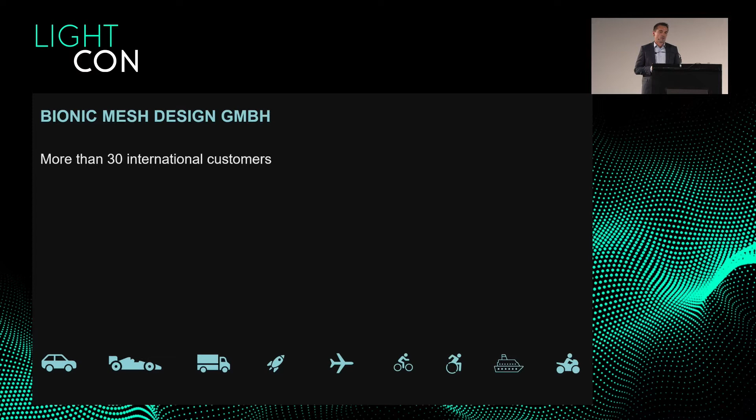I founded Bionic Mesh Design. I have 2 employees till today. We have about 30 international customers, mainly automotive OEMs, where we are already integrated in their series development processes.

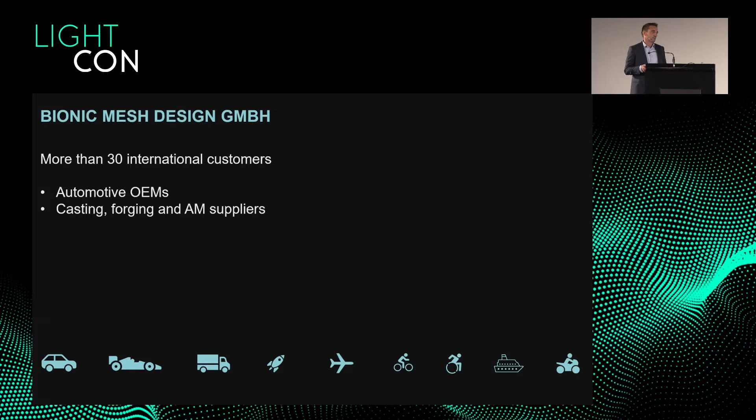We are also working together with casting, forging, and AM suppliers, especially with their research and development departments. Lightweight design also plays a small role in suppliers for manufacturing systems, to reduce mass and make their machines running faster, and there additive manufacturing has an increasing role now.

Wind power is also something related to additive manufacturing in our case, and for sure also aerospace engineering. So what we provide to our customers is definitely a way to stay in their desired manufacturing method and just take as much mass out as possible. It means in the end they automatically save mass and by that also cost.

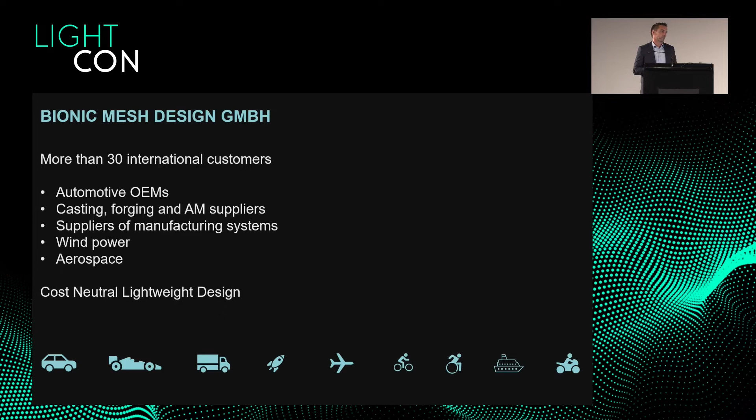I think what is distinguishing us is that we can deliver extremely light components in an extremely short time. How this is working, I will show you in the next minutes.

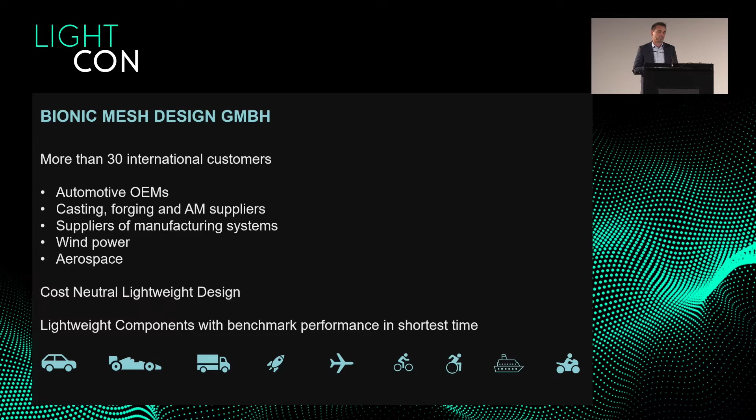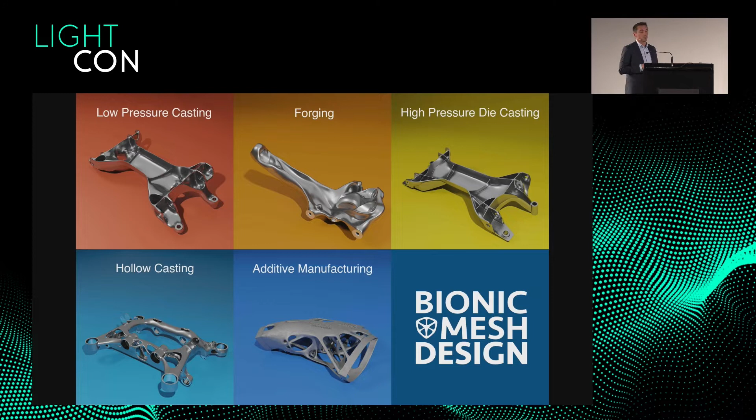We have a wide portfolio in developing lightweight components. Mainly we are focusing on, as the title of my presentation says, mass production methods like casting and forging. And for sure we are also developing components for additive manufacturing.

But first to my own motivation to pursue lightweighting. Since my studies, I am infected with lightweight engineering or lightweight designs and learned that lightweighting is directly related to payload, especially in aerospace, but also in heavy cargo industries, where till today lightweighting has not played a major role yet.

Because the only trucks which are running on full load are tanker trucks. But electrification leads to a rethink now also in this area, what we directly see in an increasing demand of our services in this field.

On my next career stop in motorsports, I learned that lightweighting is associated with driving dynamics. A lighter car accelerates faster, you have higher cornering speeds, you can brake better, you have less tire wear and also less fuel consumption.

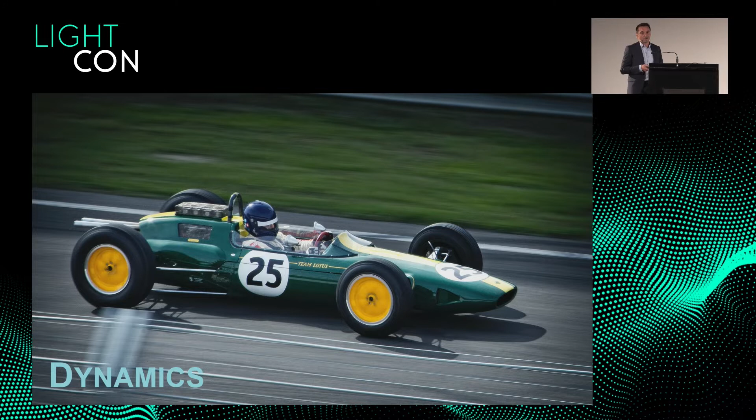I think an extremely big topic now is range, especially for electric cars, but unfortunately I have no numbers related to that. For combustion cars, 100 kilograms less in the final mass of the car leads to a reduced fuel consumption of about 0.5 liters per 100 kilometers.

What is this similar thing in EVs? I haven't found yet. So especially electrification leads to a higher demand in using aluminium. There is no way around using aluminium, and lightweighting will play a decisive role in using this really important material in the future for cast and forged components.

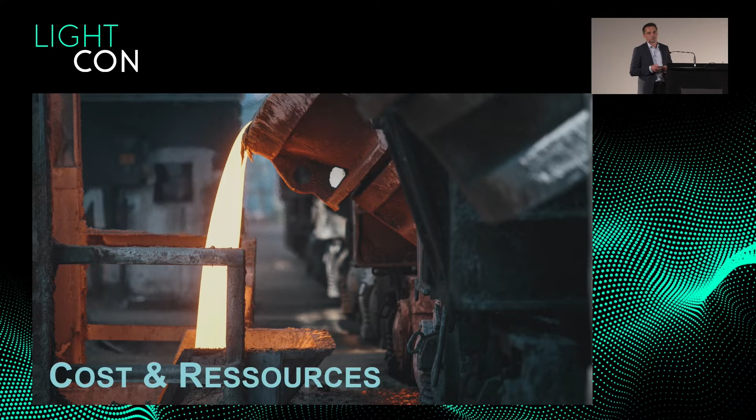What I learned, especially in my work at Daimler, is that big OEMs tend to use the most complex solutions first before optimizing the processes they already have. That means the first thing, as I mentioned before, were composites, which failed for really large-scale mass production for cost reasons, definitely. Another thing is cycle times.

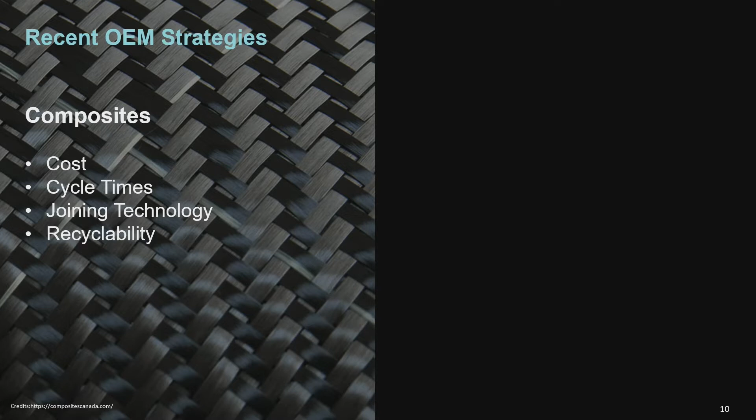A major problem is joining technology, because you have to combine a composite material which almost has no temperature elongation with a steel or aluminum body, which is leading to massive issues in the curing process in the oven after the dip coating process. And for sure, considering sustainability, recyclability is nothing which is really solved yet.

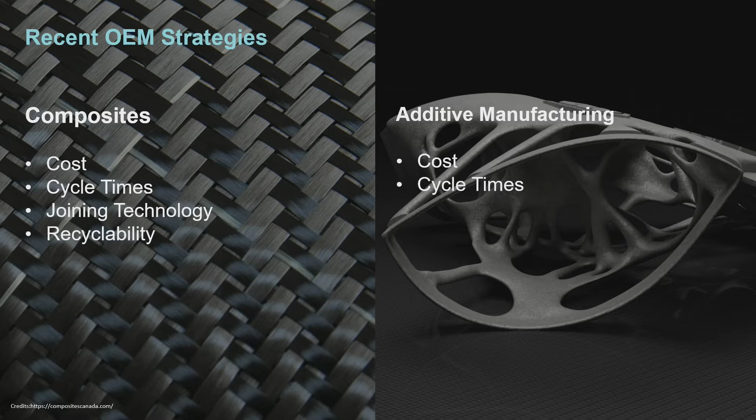Another big thing was additive manufacturing, where people already made some movies where we should print whole cars in the future. I think additive manufacturing in automotive engineering has its space, but definitely not for large-scale mass production, for the known cost reasons - we still talk about €3 per gram of printed aluminium in the final component, at least. And the same thing as in composites: cycle times.

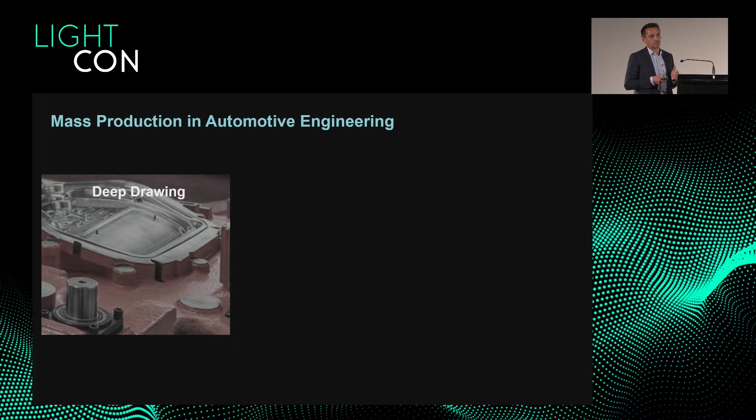So then we have the remaining main production methods. I think the most used is deep-drawn sheet metal components, but I believe that lightweighting is not really possible by having a car which is purely based on sheet metals, because you have to give the optimizer a certain range of thicknesses, and in many cases you automatically run into issues with the joining technology. And the second thing is available coil thicknesses - is the optimized sheet metal thickness available at all?

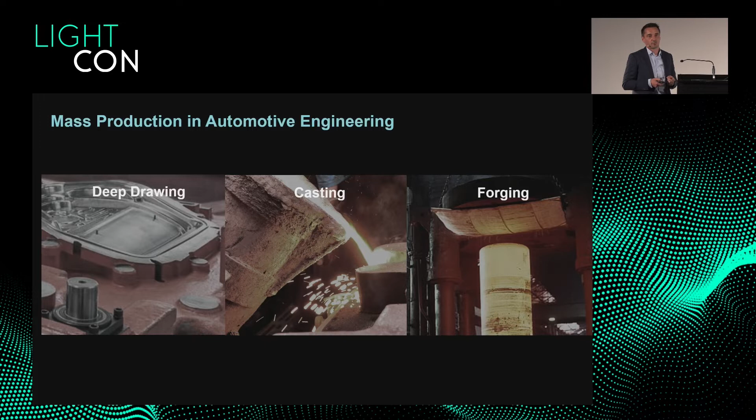We believe that technologies like casting and forging, with these high degrees of freedom in terms of the final component shape, are the best basis for topology optimizations. Because of that, we are mainly focusing on these production methods.

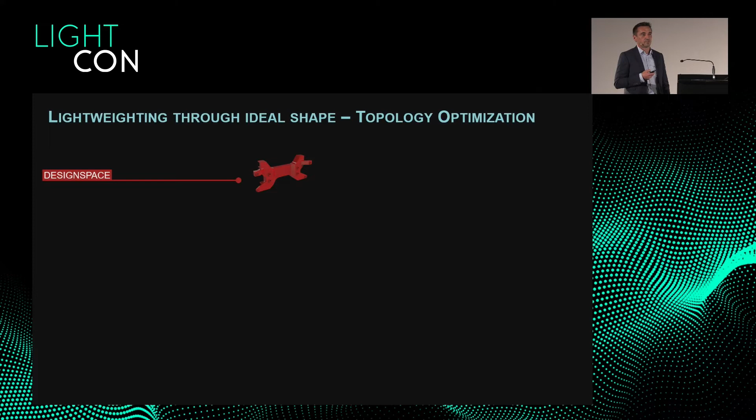We believe that the simplest and most sustainable way to generate lightweight components is by starting with the ideal shape defined by topology optimizations.

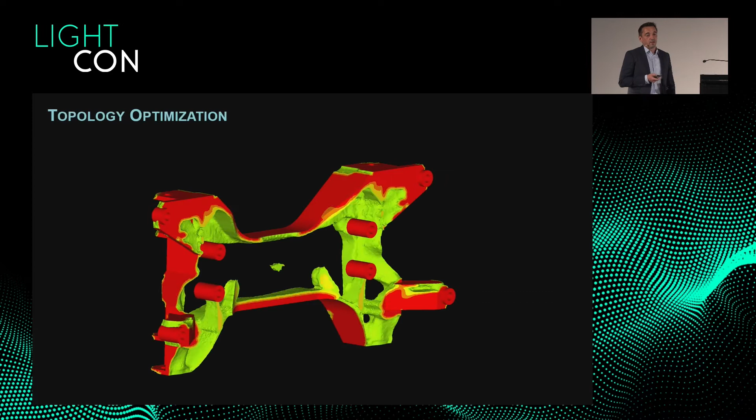You start with the design space, run a topology optimization, and depending on the desired manufacturing methods, you can already define certain manufacturing constraints. Here in this case, a so-called draw constraint allows the optimizer only to generate ribs in a certain direction.

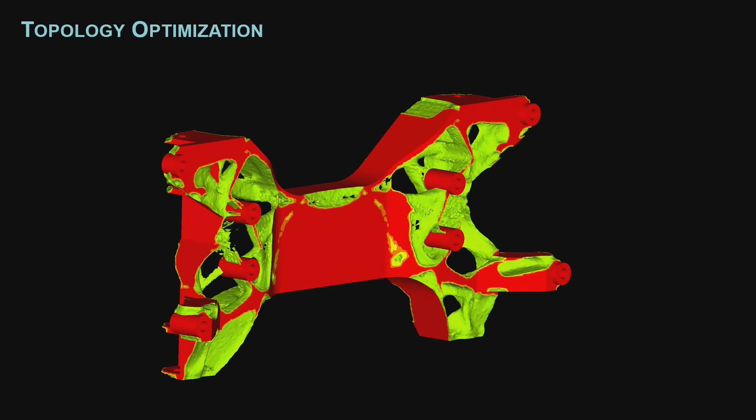But as you can see, you get back a result which is far from being a manufacturable component. You still have undercuts, regions with too much material, and regions which are too thin. So the problem here definitely will be how to bring this result into a manufacturable design.

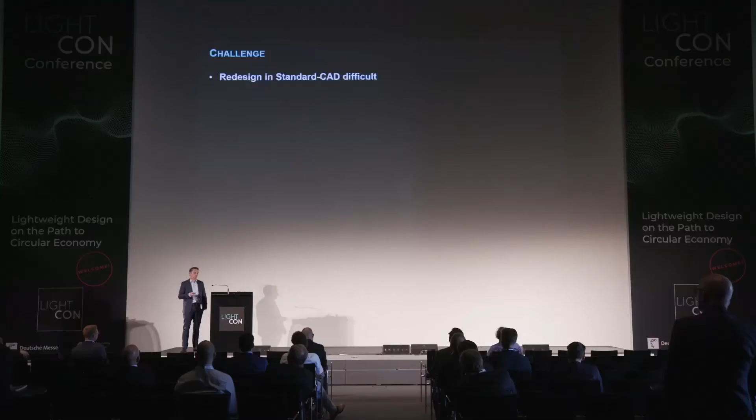That was my experience at Daimler, that in almost no case I saw my work in the final component. So you have to redesign it in standard CAD with the restricted functions in standard CAD.

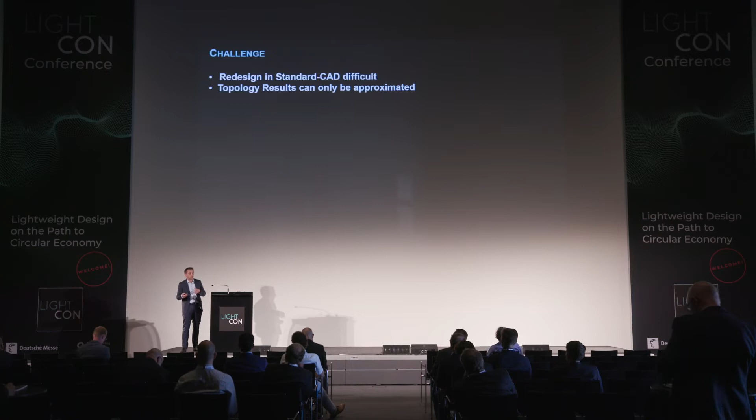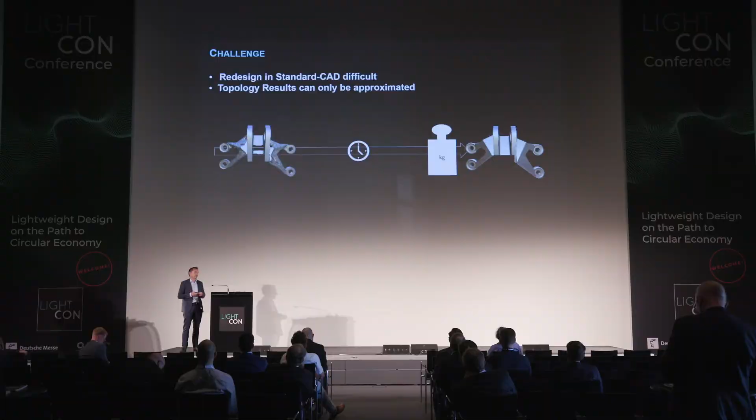In the end, solid modeling is just a way of stacking different bricks and maybe cutting them away from the base body, but you have a really low amount of functions to approach this really organic shape from the topology optimization. And in the end, this is leading to a loss in the mass and the weight saving potential.

So I was looking for a way to make it different. I'm a CAE engineer, originally not a CAD designer. I also started with CAD design, but I had the same issues like the other CAD designers.

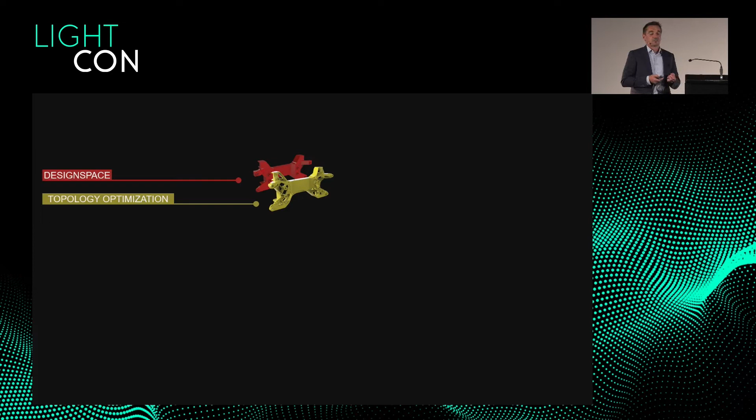So I was looking for a different way, and I found out that there is a second world dealing with 3D models. That means everything you see in an animation movie or a game are 3D models, characters, creatures. And I found out that this technology to generate these creatures is already implemented in all CAD tools.

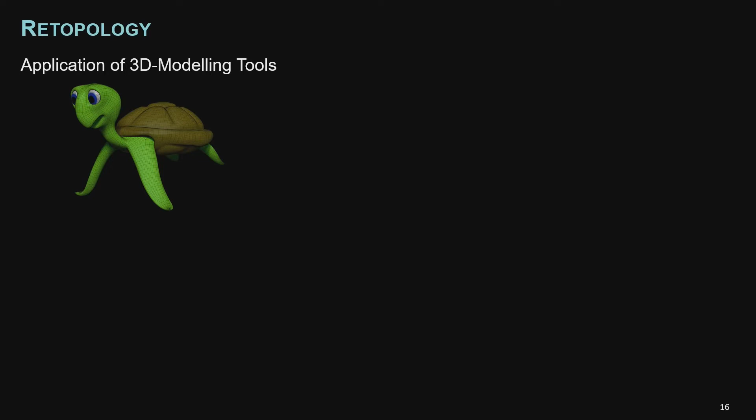It's called subdivision modeling. All the major CAD tools have a tool bench for that, but usually it's only considered as a styling thing for designers, for artists. So usually a mechanical engineer won't use this tool bench because it's too complex.

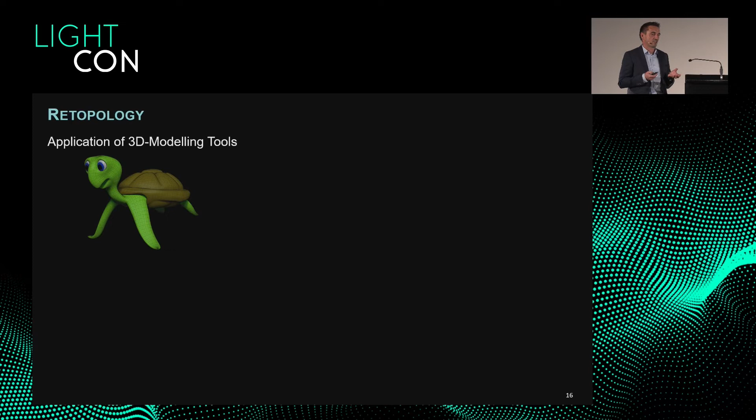But I found out this gives a chance to stay as close as possible to the topology optimized result. And by using a creature-style mesh, we are able to generate a CAD model which is based on a so-called polygon or subdivision mesh.

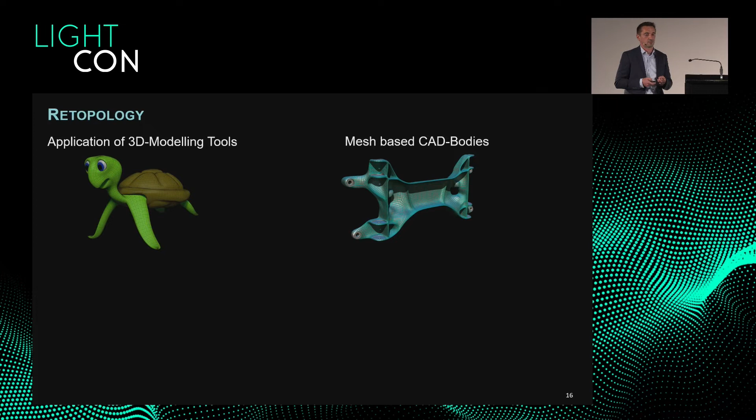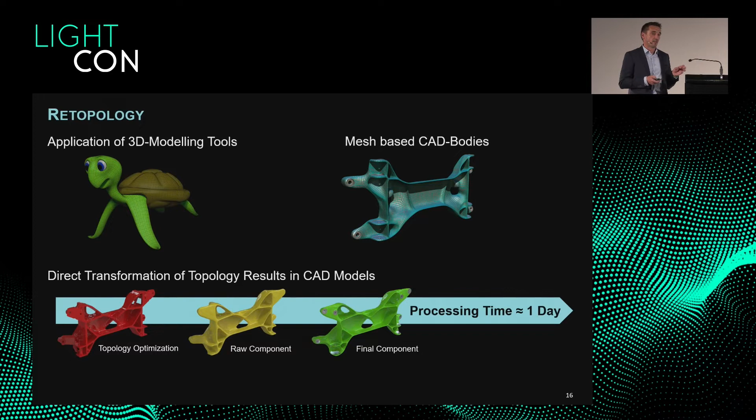This allows for a direct transformation from the topology result into a manufacturable raw component, and in the end the mesh from the tools we are using can be imported back into CAD. And it's not dumb data—it's still a living mesh which can be adjusted by the CAD designers at our customers on their own.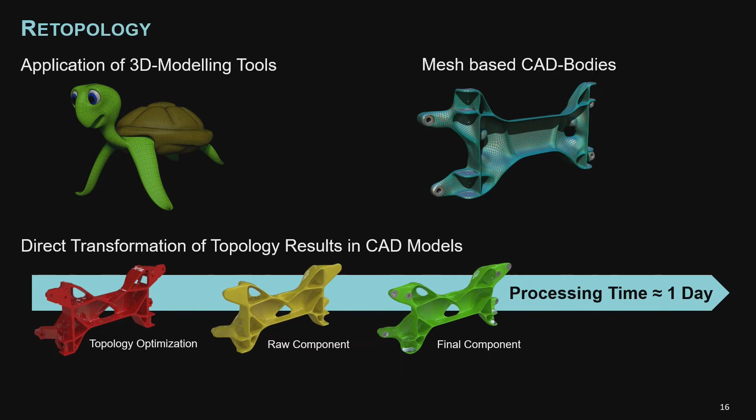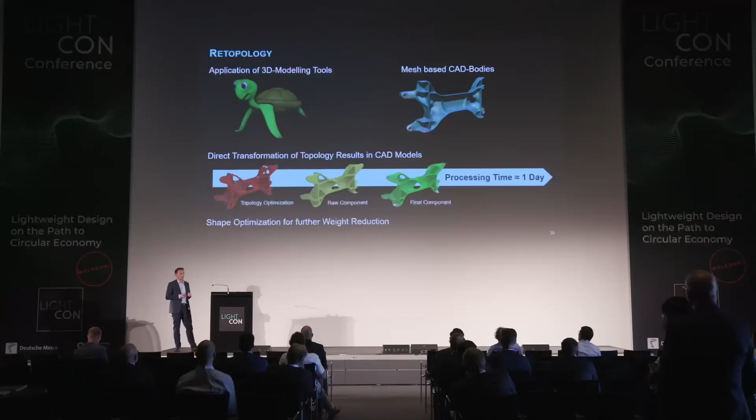Having a flexible CAD mesh allows for additional optimization methods. For me, topology optimization is only the beginning—it gives me just an idea how the main load path should look like. The final design comes in the end from the shape optimization. I will show you this also later.

So this is one of the workflows we use to turn the really ugly STL model into a manufacturable CAD model—here in this case for a cast component.

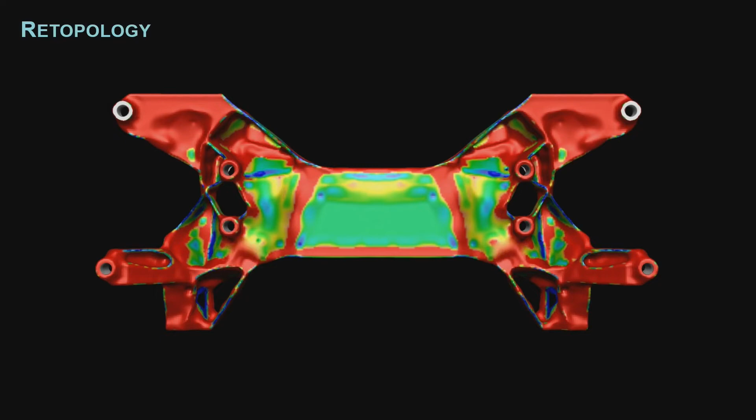I think some of you might wonder if this is an automated process, but it's definitely not—this is all done manually. It's more an artistic approach than engineering. But using this technology, it's possible to generate all shapes.

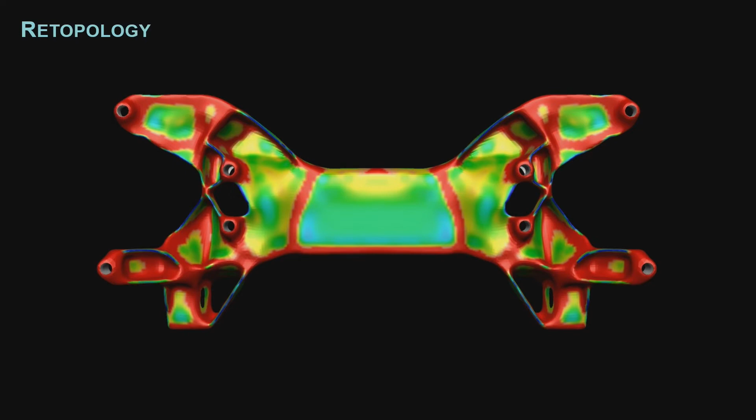What we are doing here is mainly adjusting the thicknesses to make this topology result a castable component. We close holes, and in some cases we have to remove ribs or split too-thick ribs into several additional ribs.

This process takes about one day. I think compared to doing the same thing in CAD, this would take at least one week.

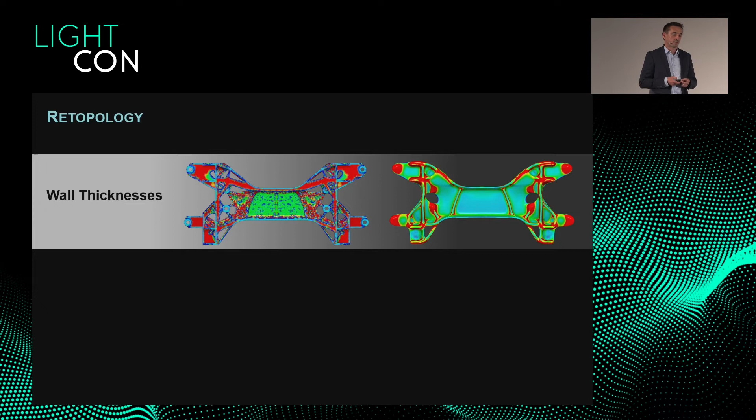But on the other hand, generating a shape like this in solid modeling is almost not possible. As I mentioned before, the wall thicknesses are adjusted, and in parallel the draft angles and the parting line for the casting mold are also directly defined in this process.

This also allows for an initial idea of how the parting line for the casting mold should look like, as I know each casting manufacturer has its own philosophy about the molding and how the parting line should look. But subdivision modeling in this case also allows for really quick adjustments of the design.

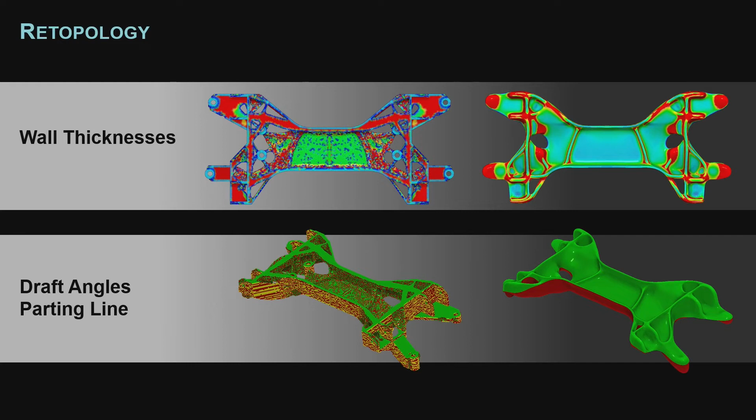We have running projects with OEMs, and their casting suppliers are also now using this method to fine-tune the design to make it finally manufacturable.

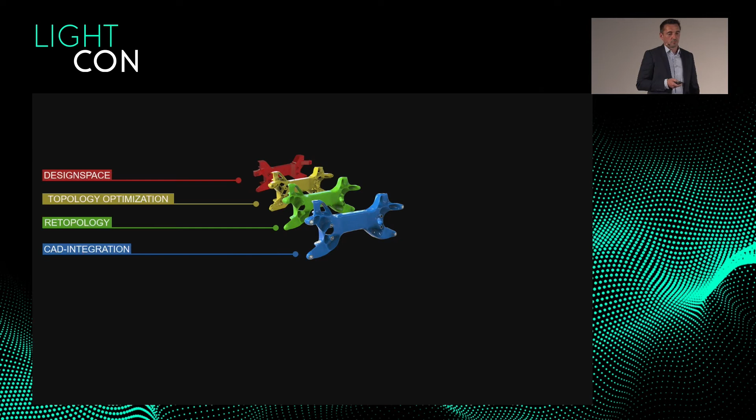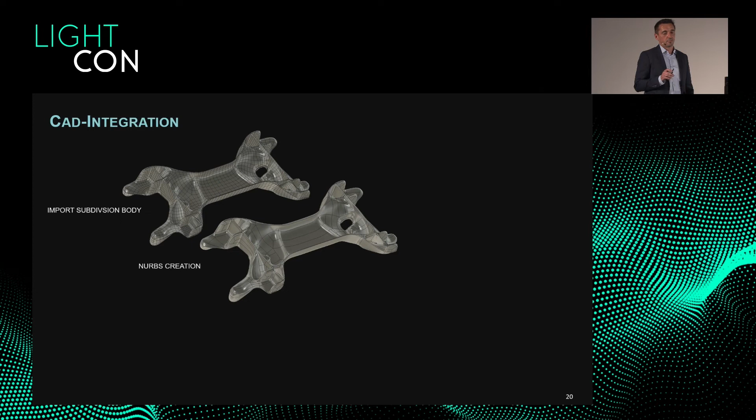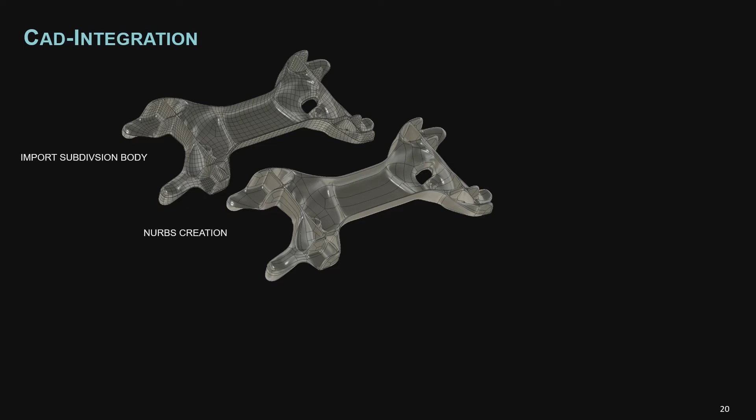As I mentioned before, we are able to bring this mesh back into CAD. Depending on the CAD tool, each polygon is handled as a B-rep surface, or several polygons are combined into larger patches. All CAD tools have in common that you can always go back into subdivision mode to adjust these designs. Subdivisions are not precise, so I can't tell the shape to have a certain radius of 3 millimeters—machining operations still have to be done in standard parametric CAD. So within one day we have a first final manufacturable component.

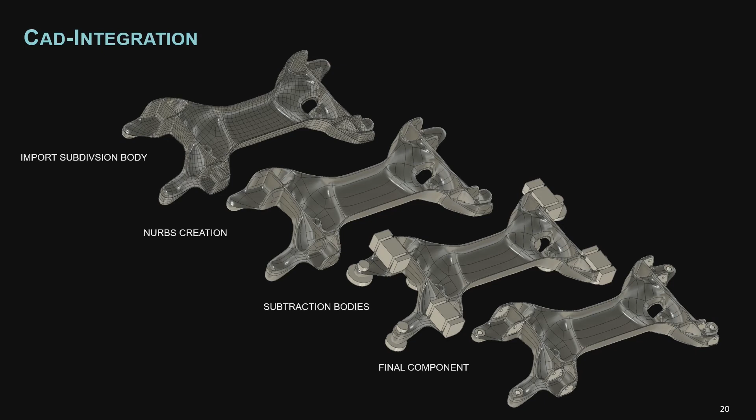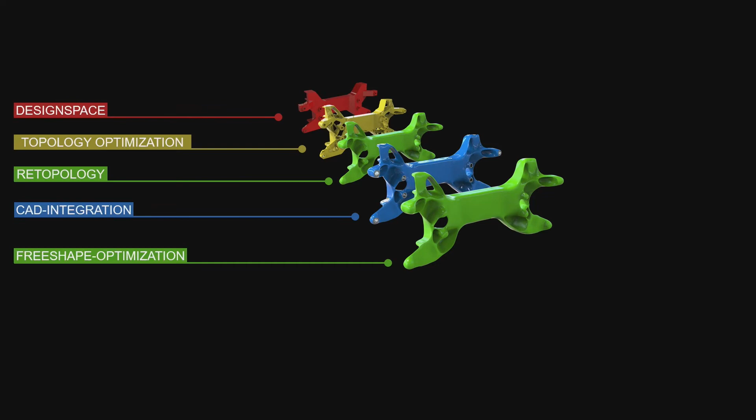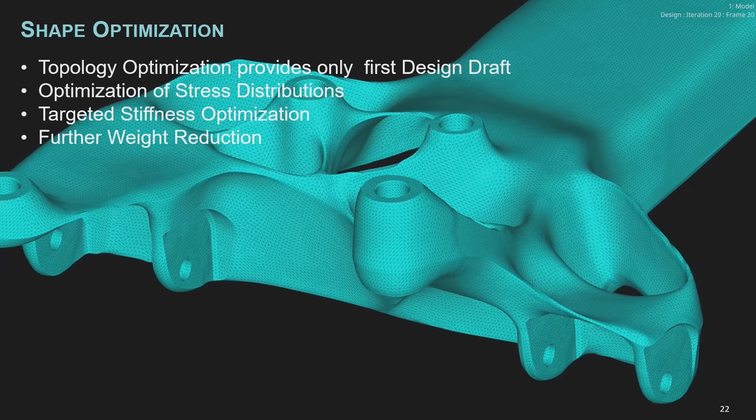Now an extremely important step for us is the so-called free shape optimization. This feature, integrated into Tosca and also OptiStruct, allows the whole surface or model to be adjusted or fine-tuned for specific stress targets, modal frequencies, or static stiffness targets. This step is also extremely important because I have closed a lot of holes, establishing new load paths which weren't there before in the topology result. That means the model before this step was probably oversized, overdimensioned, so this fine-tuning step definitely makes sense.

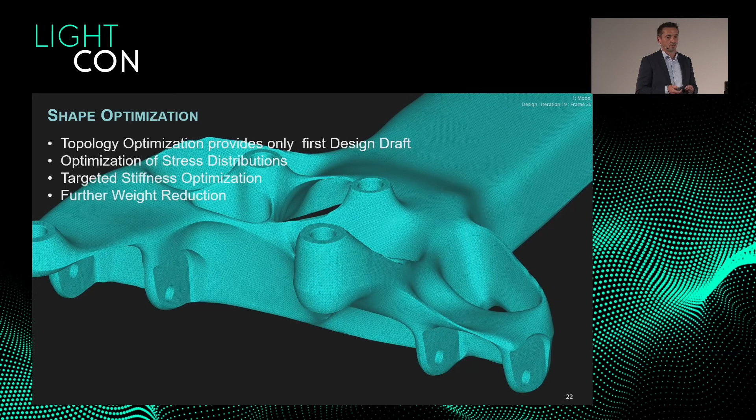Before subdivision modeling, we could do this too, but it made no sense because afterwards you'd have to redesign the whole component again. But now with an extremely flexible mesh as CAD model, we can just project the existing mesh onto the morphed shape and we're almost done. Subdivision modeling allows for real-time adjustments of the whole model, even with a drastic package change like in this case—but whatever you do with subdivisions, everything remains tangent. It's not like in CAD surface modeling, where you have to force the neighboring patch to be tangent to the one you're creating. In subdivision modeling, there's no issue with that.

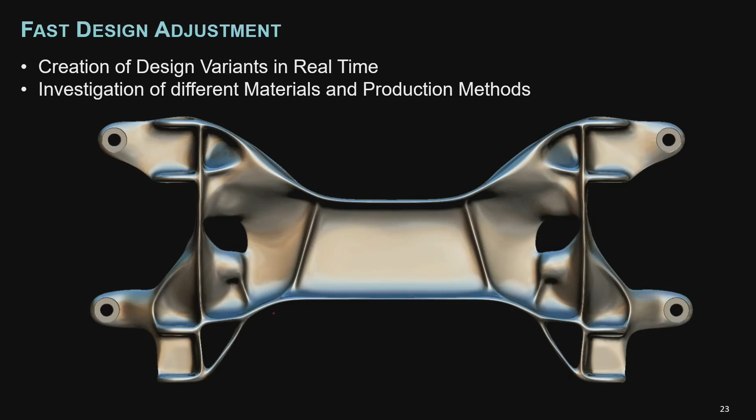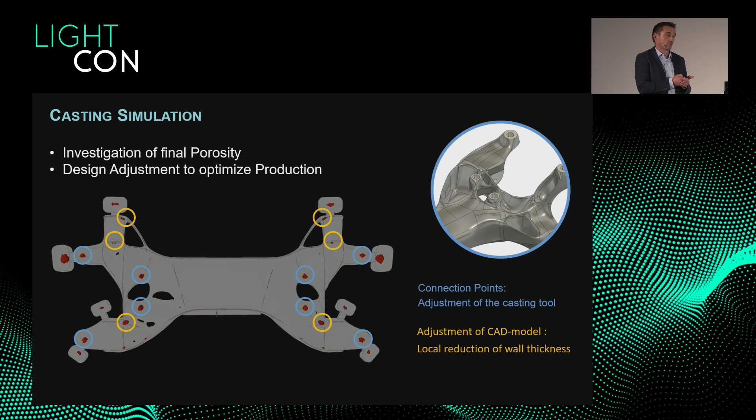Casting simulation, to be honest, plays a minor role, but there might be cases where it makes sense to run at least a solidification process to see where pores might be expected in the final component. At connection points, there's too much material, and you'll definitely have some pores there, but there are also chances to put mandrels in the casting mold to reduce wall thickness. There are also areas where you definitely have too much volume, and here subdivisions have this really big benefit that you only have to adjust the design locally. In standard CAD, to reduce wall thickness locally, you'd probably have to reduce the thickness of the whole rib or make it thicker. Here in subdivision modeling, you just pull some vertices locally and you're done.

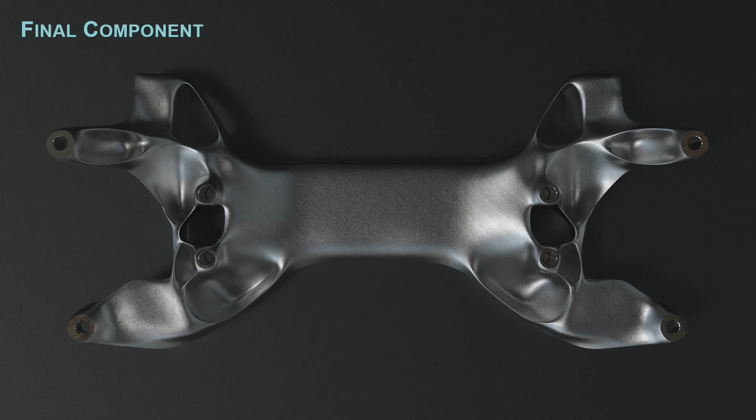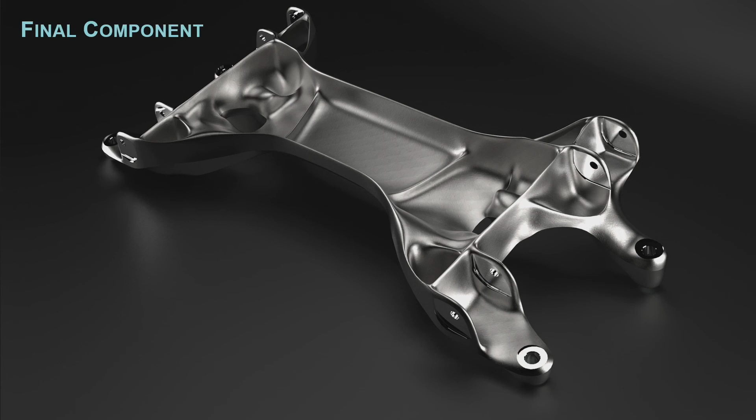Definitely in about one day we're able to generate a component like this. I believe subdivision modeling will really push the application of topology optimization on a large scale in the future, because currently—from my experience working for a big OEM—topology optimization is only used at a really late stage of the development process, when there's definitely an issue with the mass of the component. But at that late phase, you're really restricted, you have almost no degrees of freedom anymore. With this technology, having the chance for lightweight components like this, and doing it in an extremely short time, I think it's possible to start every design phase with a topology optimization in the future, and we already do this.

So thanks for your attention, and if you have some questions, feel free to ask.

Yeah, from my side, thank you for this very exciting presentation. Thank you. And yeah, are there any questions?

No, but maybe I have a question. Is this mesh method also usable in other sectors, maybe civil engineering or else, for designing and redesigning? Yeah, it depends on the complexity of the shape. For a standard building it probably makes no sense, but thinking about a bridge, for example, as soon as you have curved shapes and need a high degree of freedom in modeling, definitely yes.

Okay, yes. And the nice thing is this method has been known for 30 years. It was invented for CGI, for animation movies, but it's been implemented in all major CAD tools for 10 years, so there's no doubt that it's working. I know this, but it's very interesting—no one has used it before for lightweight design.

Yeah, we should talk. Okay. Thank you so much. Thank you.